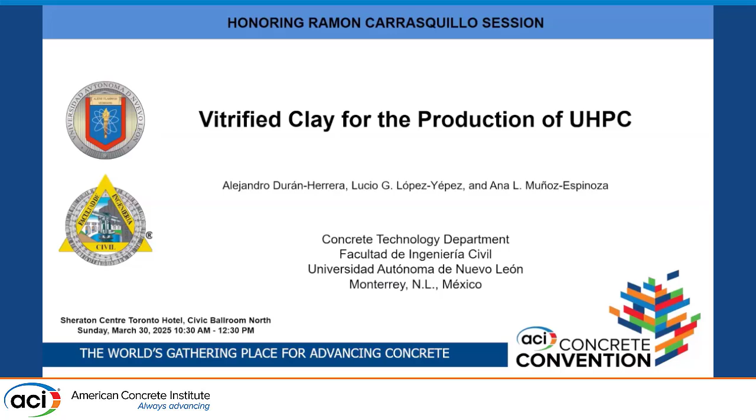First, I want to share with you what Ramon was for us. I met Ramon in 1993 in Vancouver at the ACI convention, and he was also a mentor for me and for many of the professors who work with us in the Universidad Autonoma de Nuevo León. Ramon was always very kind to share his knowledge with us and with our students. We think Ramon was like a big brother for us, the professors in our school, and a grandfather for our students. I don't know the translation of jodido in English. I looked for the translation, but I found a very bad word. But Ramon, when you meet him, always says, how are you, Ramon? Jodido pero contento. That's what he always says. So I cannot translate jodido, but I can translate contento, happy. He was always happy.

So that was Ramon, always wanting to share. When he went to our university, our auditoriums, when he gave a presentation, they were always full, because in the presentations he always told a joke. He always made jokes, so that was very attractive for students. It's a very special way that Ramon has to attract students.

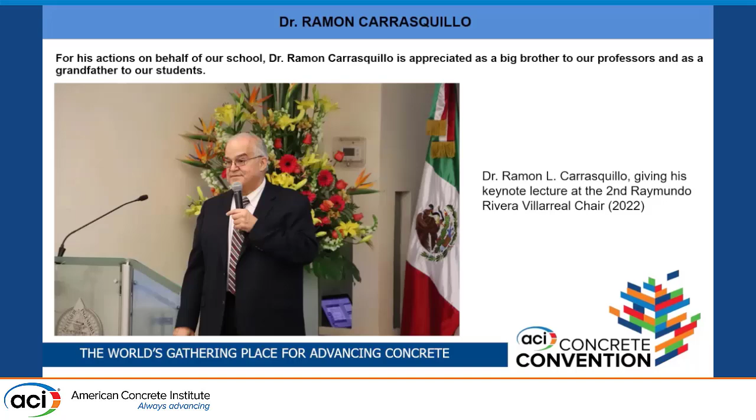So passing to the subject of the presentation, why do we want to use that byproduct in producing a very special type of concrete?

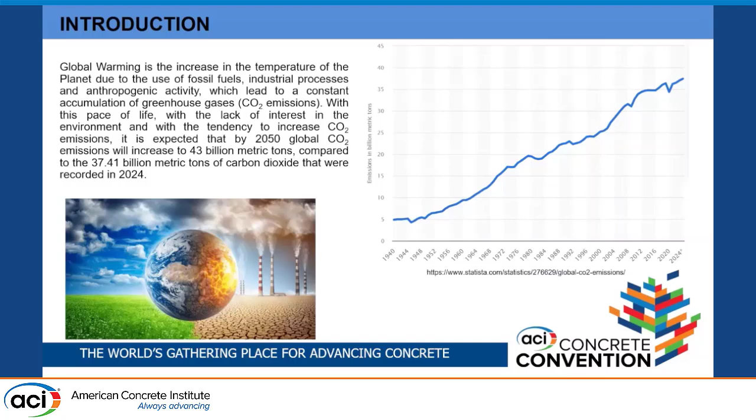One of the main claims that our industry has is to reduce the CO2 emissions. One of the ways to do that is to substitute the cement or the cementitious material used in the production of concrete with certain byproducts that are very popular in the industry, but they are not so available anywhere. I mean fly ash, a byproduct that Ramon used to work a lot with, silica fume, ground granulated blast furnace slag, but they are not available, and they won't be available in the future as we want. So that's why we are considering this byproduct to produce the cement, mainly the cement in this type of concrete. Why the cement? Because this type of concrete demands around 800 or 1,000 kilograms of cement per cubic meter. So that's a major benefit if we can diminish the amount of cement.

So these types of concretes were developed between the 1980s and the 1990s because of the appearance of high-range water-reducing admixtures that allow us to produce concrete with very low water binder ratio. So the purpose was to see how far we can go in terms of strength, and at the same time, how far we can go in terms of durability.

So these concretes are considered ultra-high performance concretes when they have a minimum strength of 120 megapascals. It can be produced easily, actually, with 200 megapascals, but it depends on the ratios. So the first development appeared in France and in Denmark in the 1980s, 1990s. And to improve the brittleness of the material,

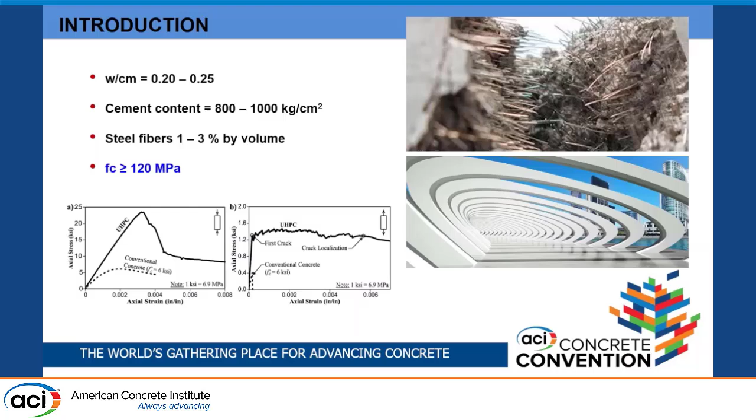the solution was to incorporate a significant amount of fibers. You can see in the pictures, and you can have an idea of how much fiber that concrete has. It goes from 1% by volume to 3%. In our case, we use just 1%. Also, these concretes are becoming very popular for architectural applications, as you see in the bottom pictures. So the fibers help to give ductility to the concrete, because concrete is a brittle material, it's not a ductile material, so with that amount of fibers, it

reaches almost the ductility of steel. So what do we use? We use silica fume, of course, a polycarboxylate high-range water-reducing admixture, limestone powder that is produced by grinding limestone aggregate in Monterrey, Mexico, and vitrified clay, limestone sand, and steel fibers. Those you see in the picture are the first generation of fibers used to produce this kind of concrete. Now the company Bekaert, the brand Dramix, has a new generation of fibers of this type. But now, also in the market, you can find some polyvinyl alcohol fibers that almost reach the performance of the steel fibers.

So this is the knowledge about ultra-high performance concretes, and the materials available to produce it are becoming very popular these days. So those are the particle size distributions of the different granular materials that we use. You can see the average particle size of the materials, the limestone sand, the limestone powder, and we prepared the vitrified clay in 4 different particle size distributions to substitute cement, silica fume, the limestone powder, and the sand, the limestone sand.

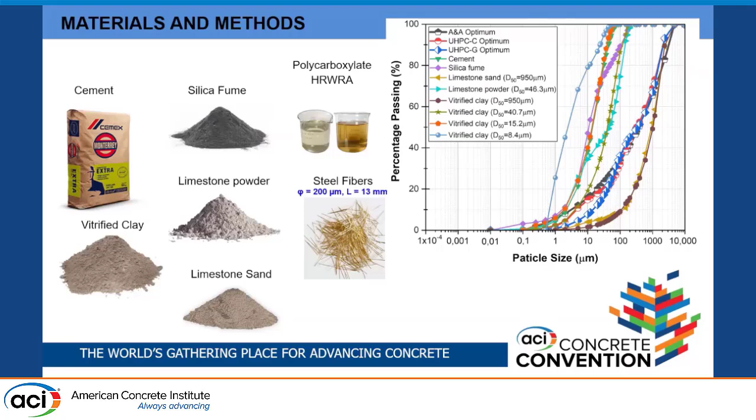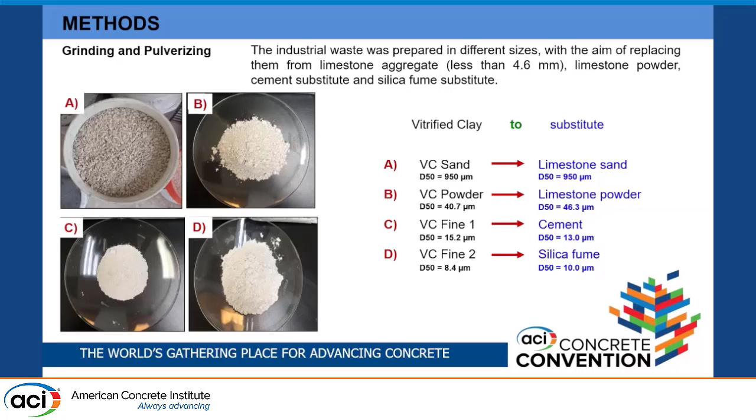So those are the 4 materials that we obtain by grinding and pulverization, and you can see the particle size distributions of the materials. As one of the first steps, we evaluate the compatibility between cement and the superplasticizers. The graphic on the left is the result for the cement pastes, and the graphic on the right is for the pastes with cement and silica fume. You can see that the bold graphic is for the admixture that results as more compatible with the mixture of cement and silica fume. So as you can see, the variations are very important in the development of these materials, to make this test to define which admixture gives the best performance with that specific cement or that specific binder.

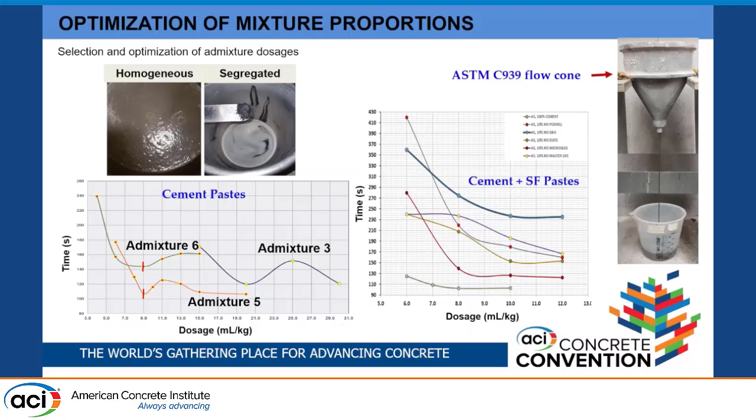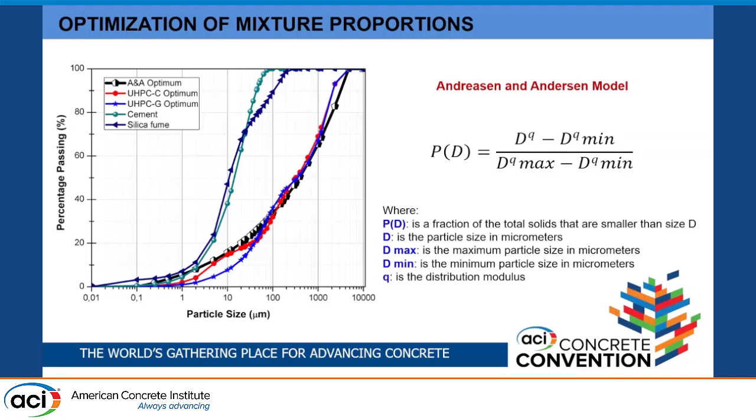Another important step in the process is to ensure the maximum packing density of the particulate materials, and for this purpose we use the Andreasen and Andersen model. With this model we define the combination of cement plus silica fume plus limestone sand plus limestone powder, and that leads us to obtain the maximum packing density. That's another important step.

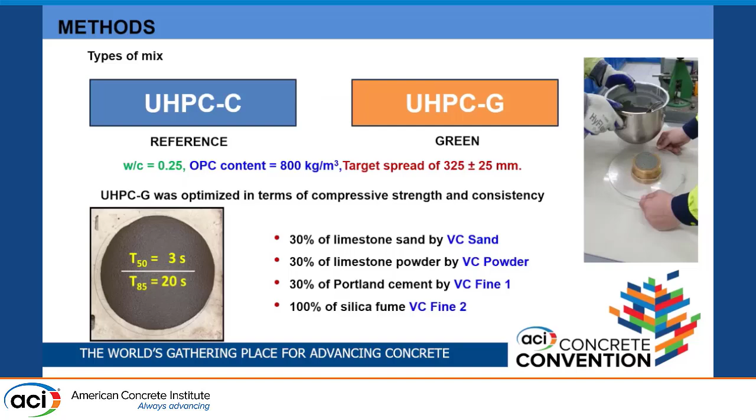At the end, the optimal mixture we produce has 30% of limestone sand substituted by vitrified clay sand, 30% of limestone powder substituted by vitrified clay powder, 30% of Portland cement by vitrified clay fine, and we substitute 100% of silica fume. You can see how was the flowability of the concrete that we produced. It's not really a concrete, it's basically a mortar because it has only sand. These are the proportions that we use.

You can see in green the cement for the reference mixture. It has around 700 kilograms of cement and 80 kilos of silica fume, and those were decreased in what we call the green concrete to 500 kilograms of cement, and also the silica fume was substituted 100% by vitrified clay.

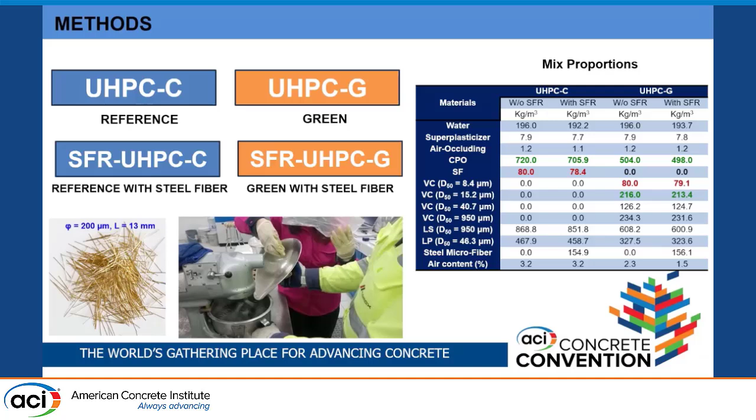We also determine the times of setting. It's important to determine this property when you substitute cement and a supplementary cementitious material, and it basically remains the same with this substitution of cement and silica fume by vitrified clay, and the air content of the mixtures was between 1.5 and 3.2%.

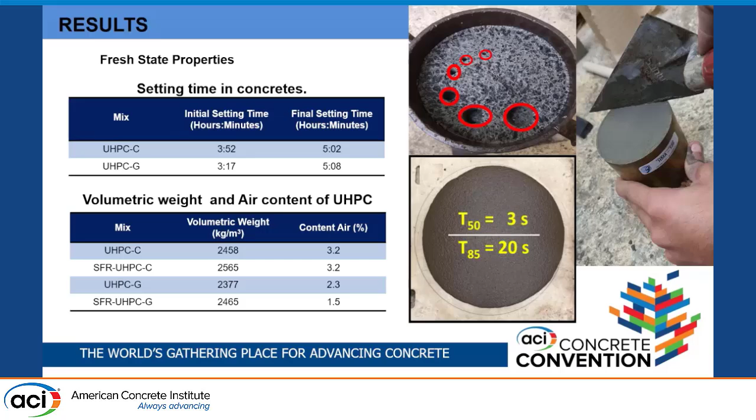This is the graphic of the loss of extensibility that is important for practical and industrial applications. At the top, the red graphic is for the green concrete. We can see that the blue ones, made with cement, the reference ones, lost extensibility in a shorter time. So the green concrete gives us more time to work the mixture, because the vitrified clay doesn't have the same reactivity as cement, so it gives us more time to handle the concrete. But you can see only 80 minutes, so this is a good application for the precast industry.

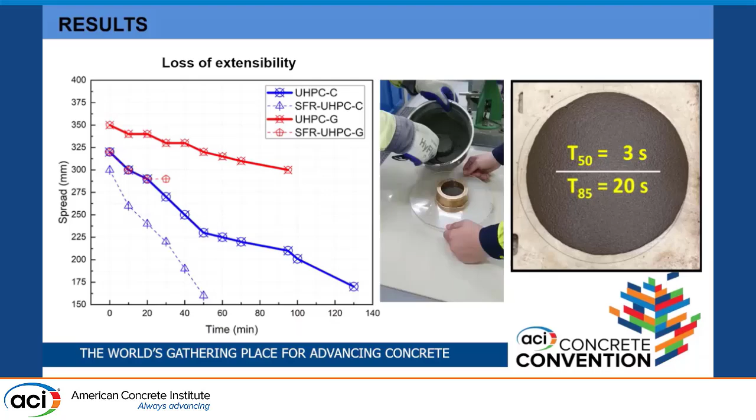So these are the compressive strength results. You can see the compressive strength development in the graphic at the top. We can see that the major compressive strength development is obtained between the first 7 days. In the bottom graphic, we can see that the presence of the vitrified clay gives higher strength since the age of 60 days, and that is attributed to the pozzolanic activity of the material.

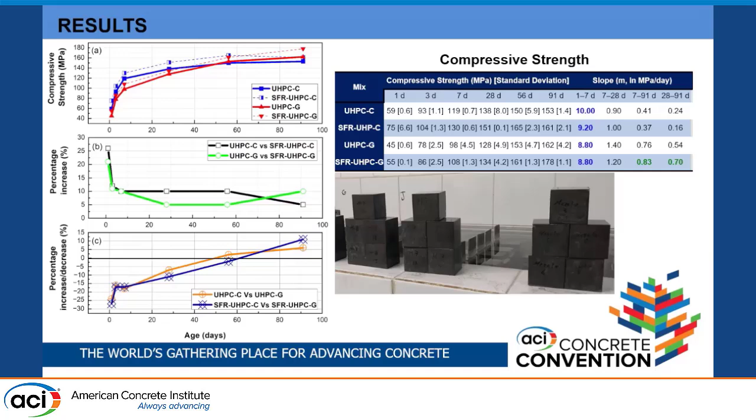The modulus of elasticity in the case of the reference concrete decreases 3.46% in the concrete that has fibers, so the fibers lead to a decrease of 3.46%, and in the case of the green concrete, to 11.34%.

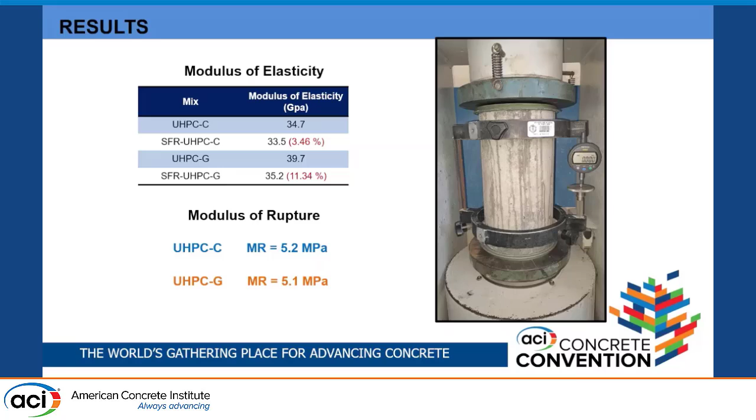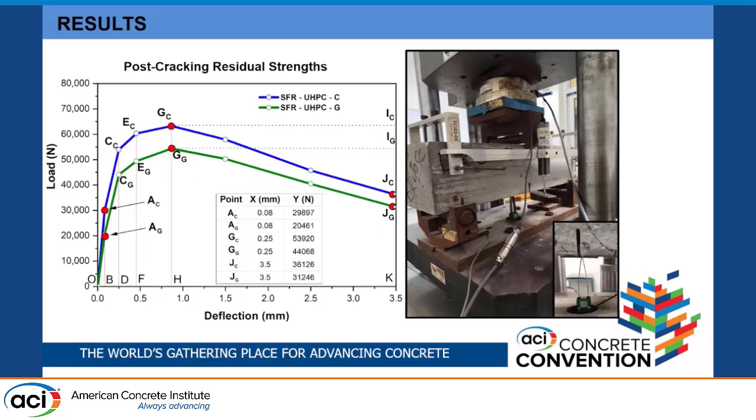In the case of modulus of rupture, we made some beams. That's the strength that we obtain for the beams without fibers, and these are the graphics that we obtain for the two concretes with fibers. As you can see, those points that appear in the graphics, the A means the point when the first crack appears in the test, and the others are the toughness indices established in the literature to determine the toughness of the material provided by the presence of fibers.

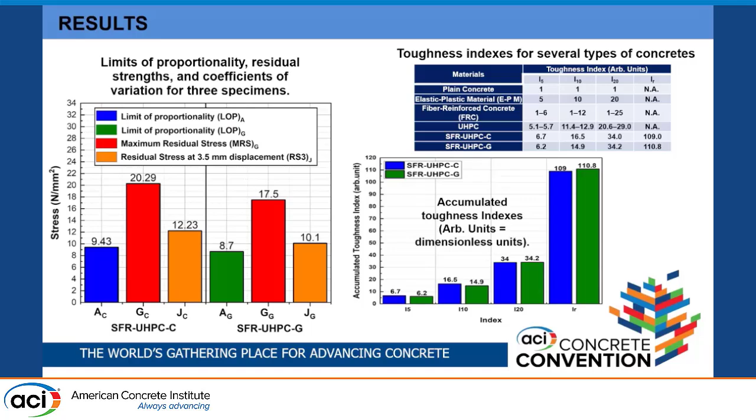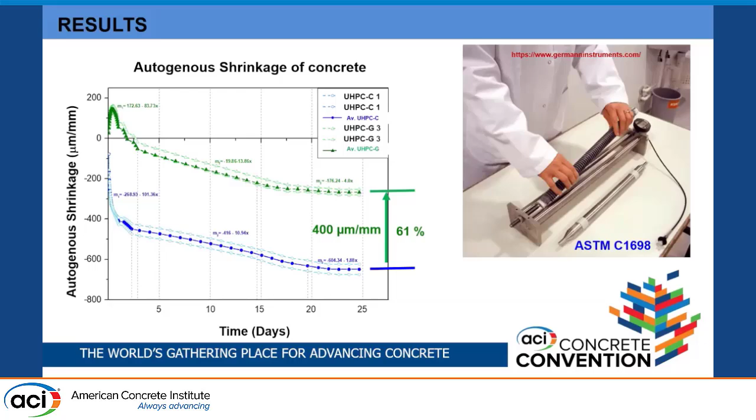Another important thing that we found: we measured the autogenous shrinkage of the concrete, and we see that the vitrified clay originates a reduction of the autogenous shrinkage of 400 micrometers per millimeter, that is 61%. This is a very good performance, because these concretes, as a result of the high cement content, normally present very high autogenous shrinkage, around 1,000 micrometers per millimeter. So it was a very good finding.

We also estimated the embodied CO2, and for the green concrete compared with the reference concrete without fibers, it reached a reduction in embodied CO2 of 27.24%, and in the case of the green concrete with fibers, of 20.19% of the embodied CO2.

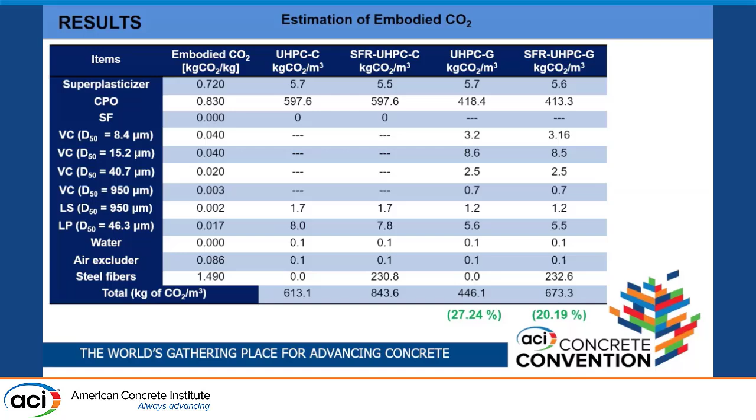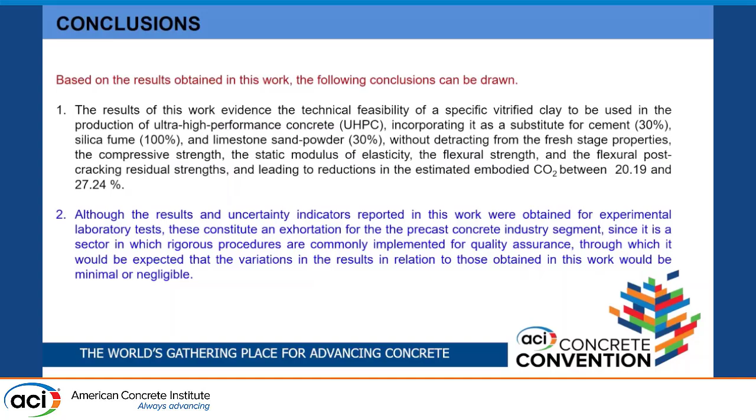Although the results and uncertainty indicators reported in this work were obtained for experimental laboratory tests, these constitute an exhortation for the precast concrete industry segment, since it is a sector in which rigorous procedures are commonly implemented for quality assurance, through which it will be expected that the variation in the results in relation to those obtained in this work will be minimal or negligible.